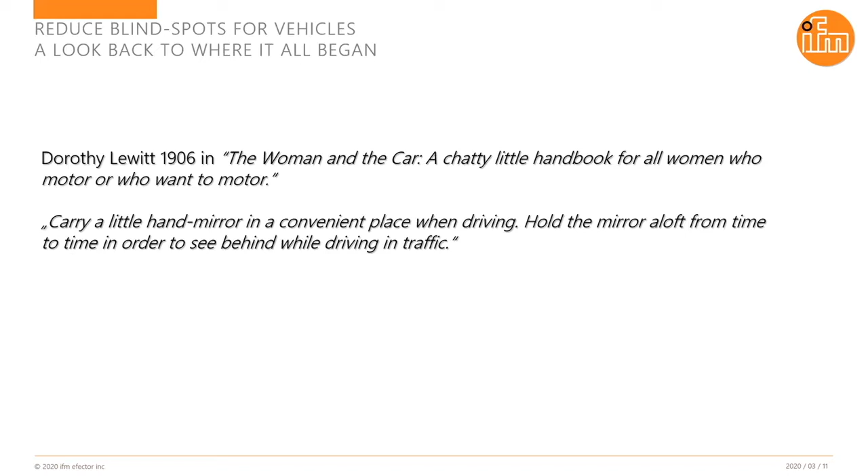And here's a good example. The first ever Indianapolis 500 winner, you can see they have a rear view mirror on board.

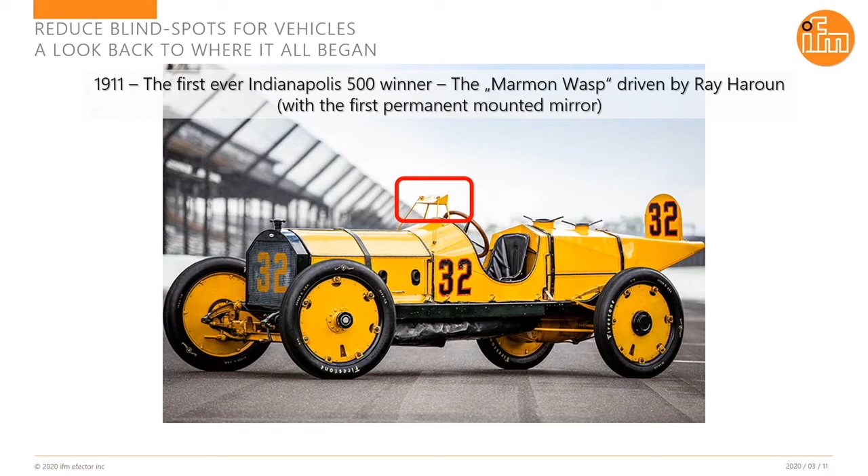I have a little video. You see that everyone is driving with two in the vehicle, and it's quite interesting. Even while going in circles, they had a mechanic on board, and the mechanic's second job was just to check where all the other participants were. And just one guy, you see him here in the middle, was driving alone, sparing some weight. He installed a mirror for himself so he could observe what's behind him. Quite interesting. He did pretty well, it turns out.

So he actually did win this. And in the next year, no one was driving with two persons anymore, but everyone had a mirror on his vehicle. So he had kind of an unfair weight advantage, but it's a small technological advantage that gave him the win.

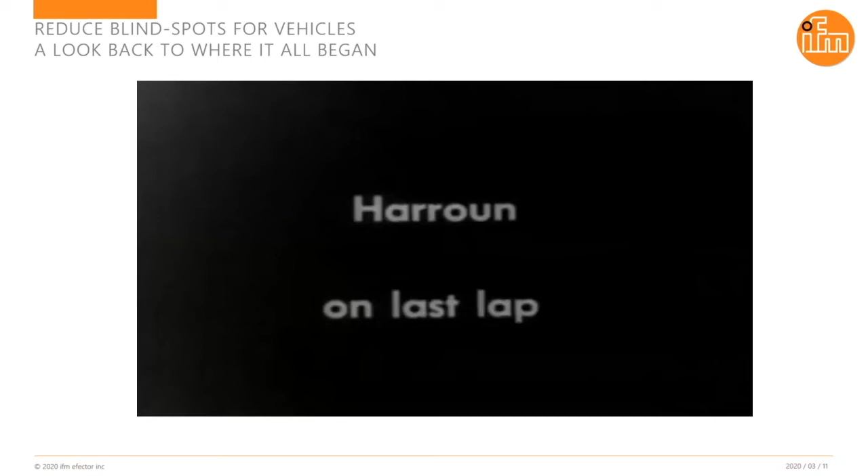Okay, so maybe coming more to our today's world. I mentioned our development and production is mostly in Germany. So in Germany for businesses, we have what we call Employer Insurance Association. For example, if you're a garbage truck operator or in construction business, your employees are insured over this federal insurance company.

That means they make rules on operation safety, for example, to prevent accidents. And they said on construction sites, drive-off, reversing, and for example for excavators, start of turning, are one of the main reasons for serious accidents involving workers on construction sites. So for them, one of the main critical areas in the working process is working with heavy machines and then the visibility for the operator.

So they identified that, and one of their demands is that in order to prevent such accidents, the contractor needs to make sure that the machines are equipped with appropriate technical systems to allow the driver to operate the machine safely. Meaning, if you're the responsible person on the contractor side and it's your machine, you're responsible that the machine is equipped in a way that the actual technology allows the operator to operate it safely and see, for example, that there are no blind spots. And there are some recommendations on that.

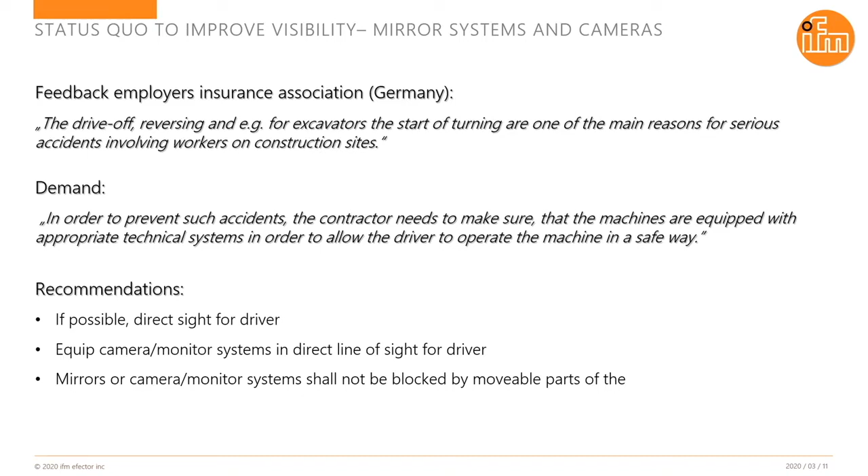If possible, direct line of sight for the operator is preferable. If not, then you can equip, for example, camera monitor systems, but the monitor should be in direct line of sight for the operator, placed somewhere he can see it easily. And the position of the cameras or mirrors should be such that it can't be blocked—on a wheel loader, for example, that you can't block it with the bucket in front. So those are some recommendations and demands.

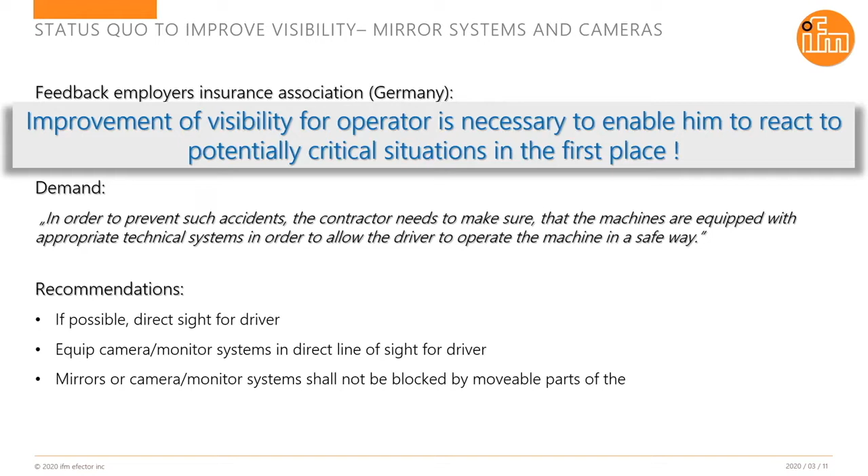So these are some requirements. They say I want to improve the visibility for the operator of the machine, but if you think about it, that's necessary so he can react to situations in the first place. If he's not able to see if there's a person or worker in the way, he can't react. But the point is that the risk of accident in this case is still dependent on the skills, concentration, and physical state of the operator.

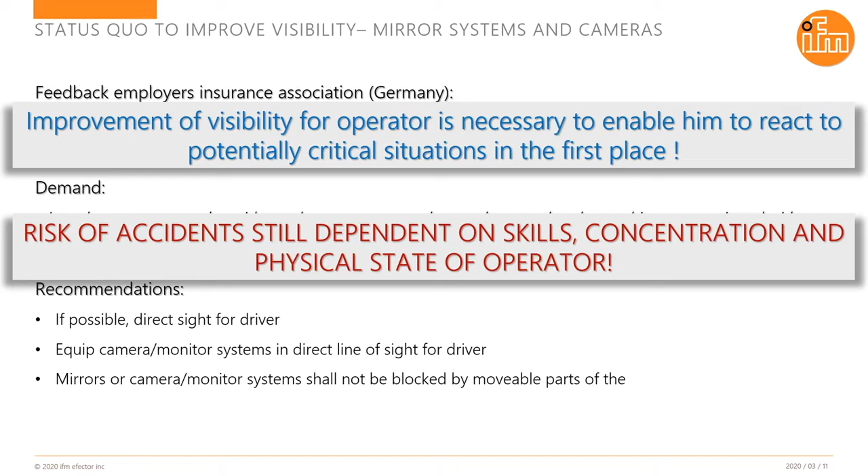So if you have an experienced operator, he will be fine. But maybe if someone is new to the job, or today maybe working on a smartphone in parallel, the safety is still dependent on the operator itself if you just have a vision system.

So that means the trend is clearly toward active assistance systems. In this case, active means I have some kind of sensors that can detect persons or obstacles by themselves and can actively warn the operator visually or acoustically, and even block or stop the machine. This is a big step into more safety, because even if the operator somehow is not up to the task in that second, the machine will stop by itself.

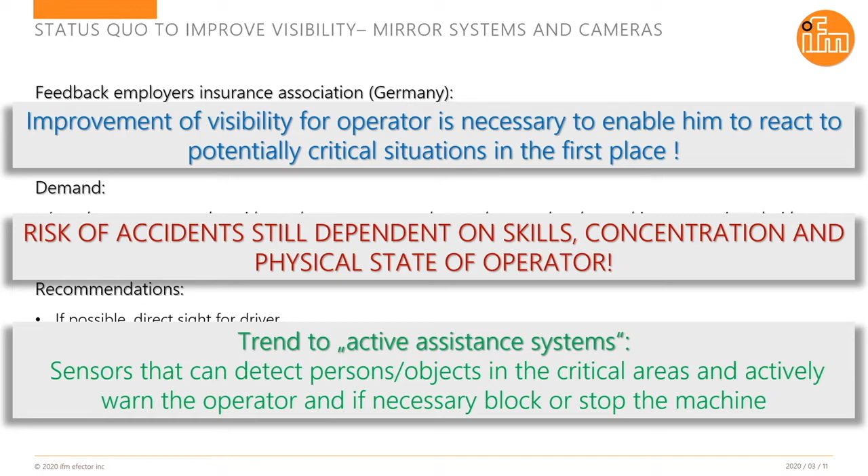So here we'll talk through the different levels of autonomy you're probably aware of, level 0 through level 5. The idea is level 0 means you don't have any assistance, all the way up through the machine can drive itself at the push of a button. So we have a couple examples to show you some of our real customer applications and where they fall into these different levels.

On level 0, there are assistance systems because as long as there is no intervention into the vehicle itself - meaning you have a system in a car, for example an ultrasonic sensor for reversing, but it's not braking the car, it's just showing something or beeping - then it's level 0 assistance.

One example for that: it's a wheel loader in a mine. In this case, it could be a system with a 3D sensor and a 2D sensor, and it works for the operator in a way we'll see later - he's acoustically warned, and you see that he has a monitor with a live feed from behind the vehicle, plus it's actively measuring with a 3D sensor for objects.

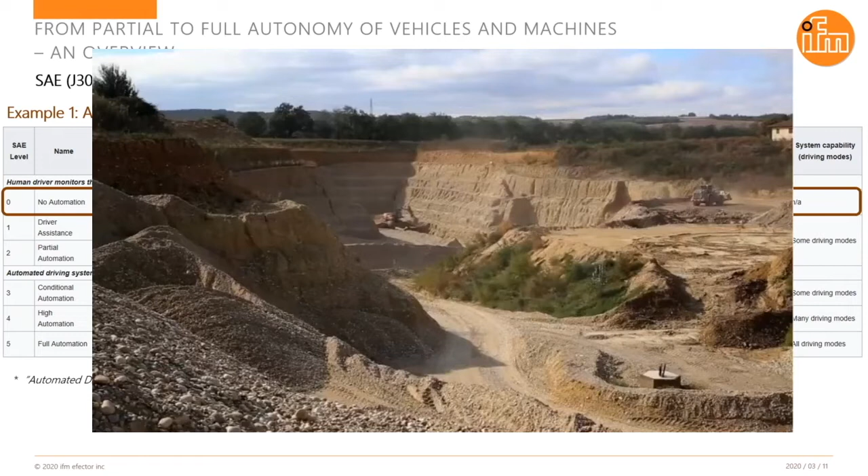So the next step would be level 1, which per the SAE definition - which comes from the automotive business - says that the driver assistance now interacts with the machine, for example by braking, but the responsibility is still with the human driver. So maybe we can see the next example.

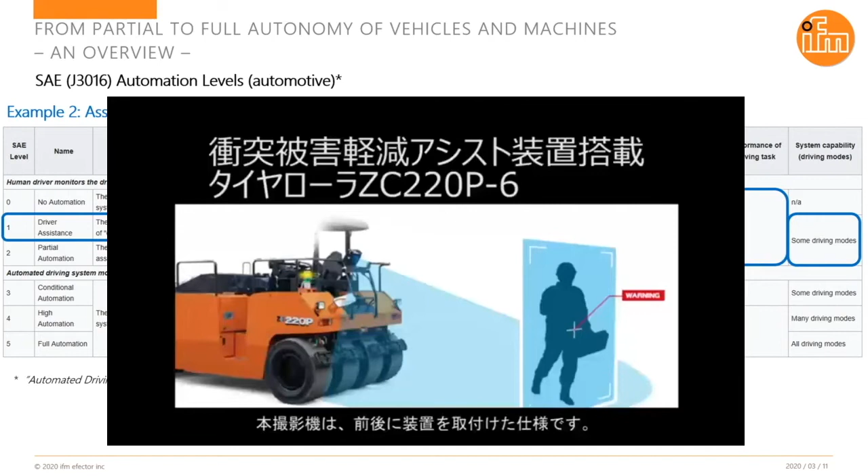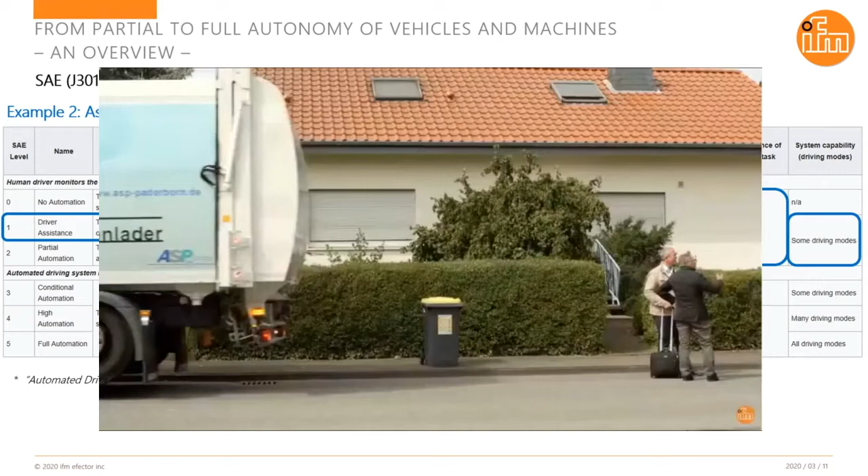That's one from a customer of ours in Japan who makes compaction rollers, very similar to what we saw before. But in this case he connected it also to the brake. So basically it has 3 levels of reaction: one is, like before, a warning, acoustic and visual - we'll see an example. Level 2 means the machine goes slower, and level 3 means it stops if no reaction happens.

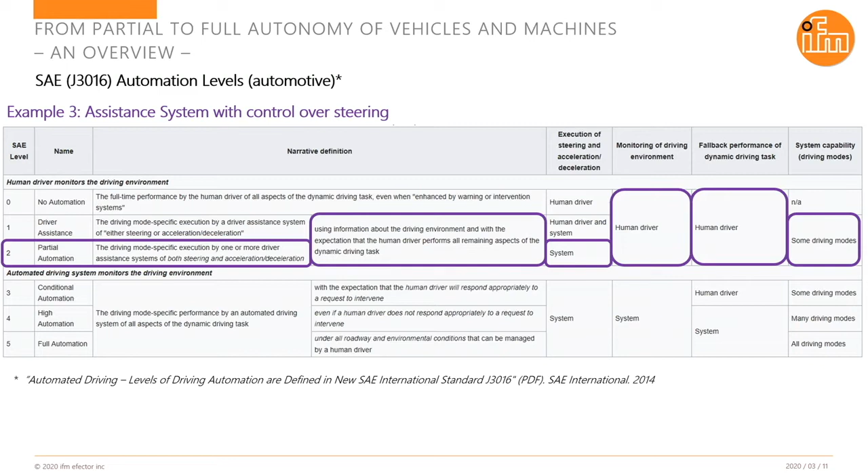So you see here, level 2 now it's getting slower, and level 3 it stopped before it crashes into the person. And we see now some example.

What's important is that it's always a bit tricky with an assistance system that interacts with the machine - it must be reliable. So the operator, if there are too many detections without cause, it won't be accepted by anyone. It will hinder your efficiency.

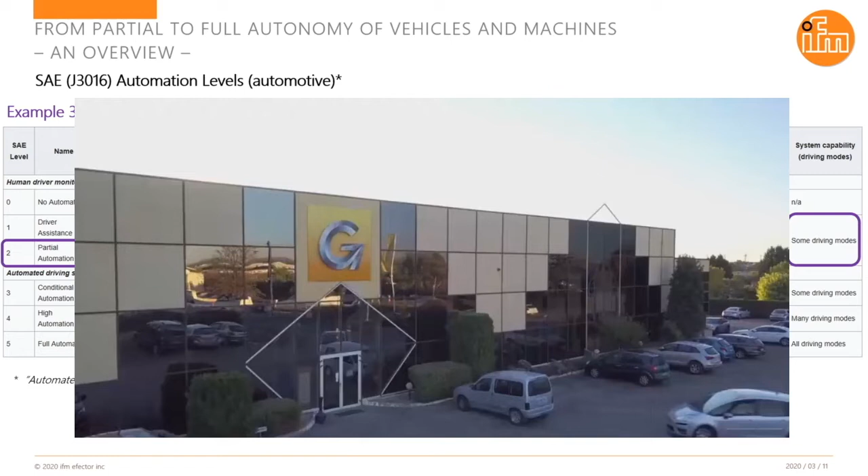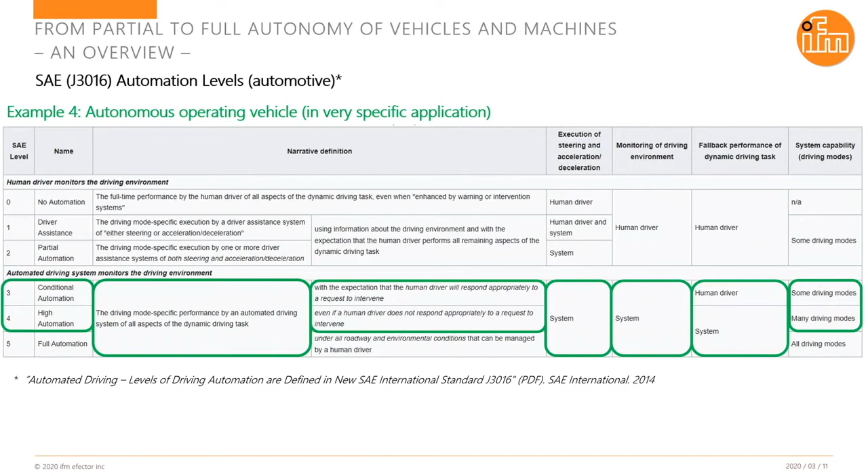But you have some critical cases, for example something coming in from the side, maybe small, it must react. But in other cases, like with a compaction roller, you sometimes need to go very close by a wall, so the system must be very precise - you're allowed to drive by, but still need to react to a person. And lastly, you see he's trying to accelerate - it's also blocking the machine from starting if there's something in the way.

So that's one example; we have another example - a garbage truck company in Germany. They also actively engage the brakes in case there's something in the way. It's also critical because the machine is big and there have been accidents, because they may approach not only trained personnel or workers, but also be on normal streets.

So in this case, it's similar - first a warning, then the brake is applied. So again here, if the driver operator is not reacting, we can have a stop of the machine in order to prevent accidents.

Okay, so the next point here would be that we do not only brake, but have some influence, for example, on the steering.

So that is an example of a customer also in France, where he has some specific vehicles for grape harvesting. And the operator in this case has multiple tasks to do. First he has to drive the vehicle along the grape lines. But secondly, he has to control the machine, for example, they are shaked for getting the grapes out, but he has to control how much is shaked and so on. So the advantage we have here is that the steering is taken over by the machine based on the 3D output. So it's an assistance system which allows him to concentrate on the control of the machine, so that he can be more efficient in the way he harvests the grapes in this case.

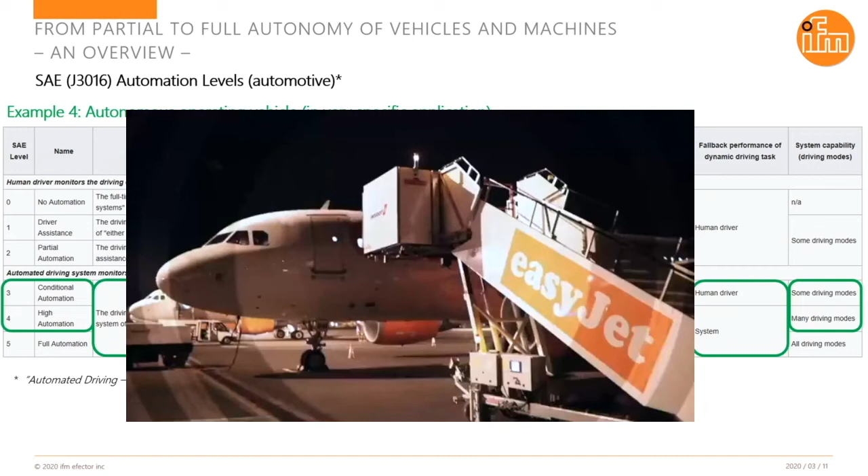So we've shown you guys a few videos of our technology in action on customer vehicles, but we haven't really talked at all about how it works. So a little bit of the science behind it.

Essentially, our key technology is a 3D camera sensor where we measure time of flight based on infrared light bouncing off the object and back. We do that calculation internally, and then the sensor does some post-processing on board and sends obstacle data or other data, for instance with the steering, into the control system. So there's limited downstream processing - it more so happens internal to the sensor.

And Dr. Kever can talk a little bit more about the specifics of the chip and what's going on under the hood. Yeah, so this technology is basically, you could also call it LiDAR because it's often used in recent years, but basically it's the same principle. So we are actively sending out a signal, in this case infrared light, and what happens is if it hits some object or something in the way, it's back reflected, similar to a radar. And what happens is that you can measure the time the light needs for going to the object and coming back, and out of this you get the distance. So you get an image of your surrounding in 3D, measuring the distance.

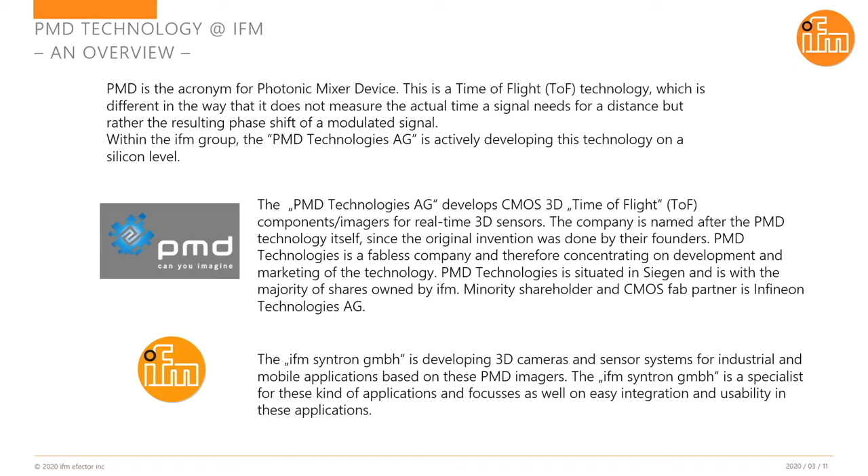And for this technology, there's a daughter company of IFM called PMD Technologies, which does all the CMOS work for us and makes the actual imagers for this technology. We are a majority shareholder, and we have a minority shareholder who is also our partner with a fab for CMOS - Infineon Technologies. So we are working together with them on this technology. And we as IFM take these imagers and put them into sensors and cameras and do all the software around it, and try to solve applications in different markets.

And as I mentioned, the basic principle of time of flight, like used in radar for example, is that you send out a short pulse and you get some reflection back. The distance can then be calculated out of the time the signal needs to come back, and in our case this is over the speed of light - you can calculate the distance. Light is quite fast, right? So 1 centimeter is roughly 67 picoseconds of time in this domain.

This is, for example, also used in every laser scanner. This measuring principle, PMD, is a bit different in that we are not sending out a single pulse signal, but rather a long signal which has a kind of modulation, repeating at some specific frequency, in this case mostly between 5 and 100 megahertz.

Our light signal, we are not looking at one time delay, but rather at the phase shift. So what we get is a periodic signal sent out, and we get a periodic signal back, and there's a shift in the phase between them.

It works quite nice because it's much easier on the electronics to evaluate that instead of these very short times. So we need much less bandwidth, which allows us to build images like 2D images which capture 3D, and we have a lot of resolution in that.

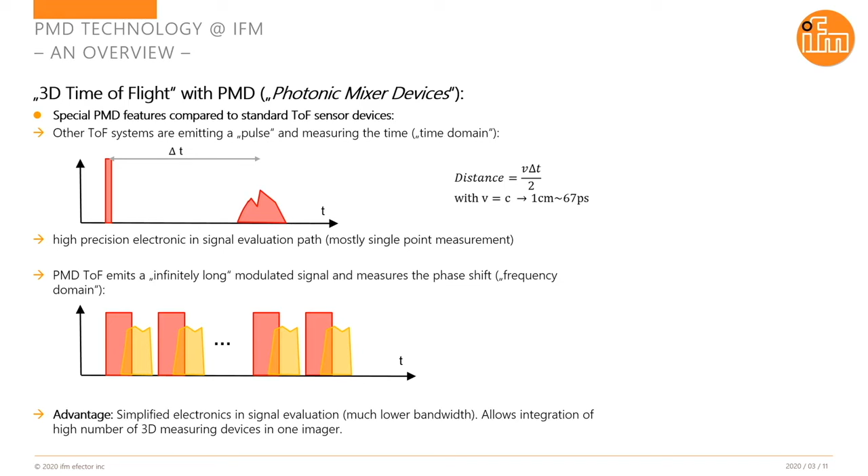Maybe that's a bit of detail, but the pixel itself is like a normal photodiode, but a bit special. We have not one capacity which we are loading with the information, but two.

We are modulating with the frequency I showed you before, also the receive unit here, meaning that depending on the frequency, it's put into the two different capacities.

The difference in the capacity, so a difference in voltage, is directly proportional to the distance, and that is what we evaluate. You see the advantage here: we don't need to try to measure very precisely a short time, but rather we get some voltage signal which is easily evaluated. So this is a single pixel, and we build up a patch, an imager with a lot of pixels, and get all the information at the same time.

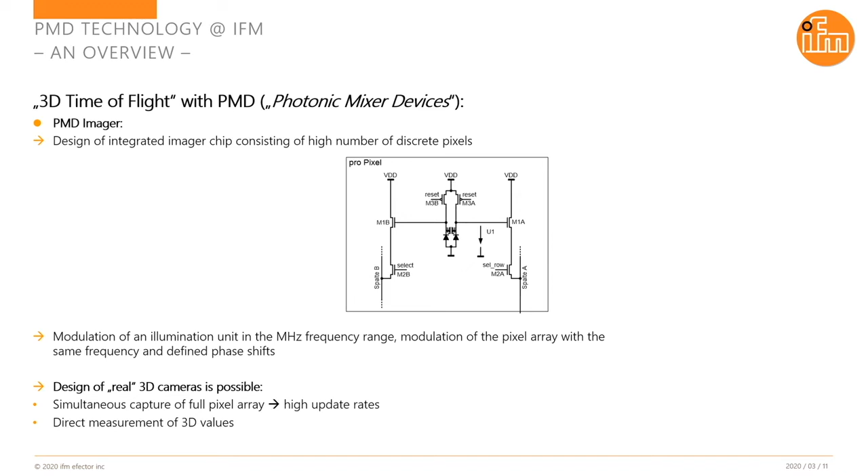We are trying to do this for many applications and markets. With our daughter company, PMD Technologies, we try to address the consumer market. Typical applications here are gesture recognition, face unlock on the smartphone, some games, virtual reality stuff, and also automotive applications, mainly gesture control of the radio or something, and important driver awareness, checking if the driver is awake and looking at the street.

Then we have the industrial business. We are here in the mobile market, mainly collision avoidance, distance control, and other applications like line guidance we saw. But we are also addressing industrial automation and robotics as markets.

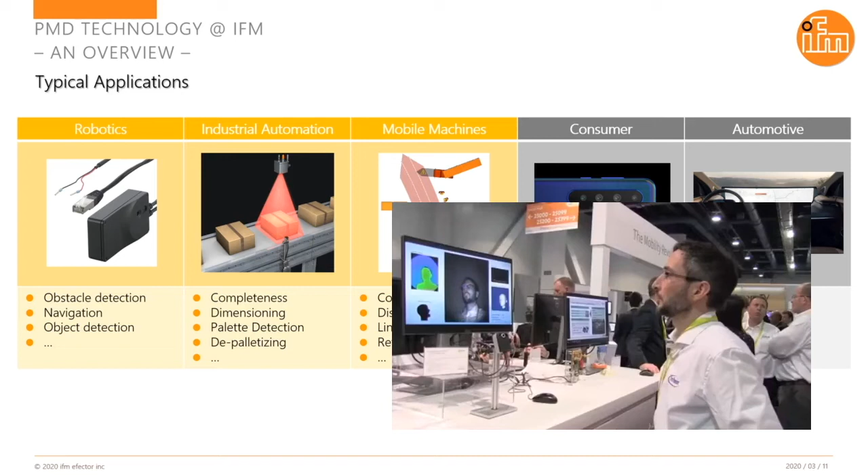This is an example out of industrial automation where, for example, dimensioning is a point that's classically scanned for the size of packages, and this has some negatives here because it's rather slow. You have to stop the parcels and wait until it's measured, but when we do it with 3D imaging, it's much faster.

You can do a single shot image and get all the information. If the band is not too fast, you can even do it without stopping at all. Since you just need one sensor and it's all processed in the sensor itself, you can even have multiple positions where you check, so it's more dynamically usable.

A last application out of robotics: we have a company here as a customer called Bossa Nova, and they make this kind of robot for Walmart. They drive through the Walmart and check the status of the shelves, how many parcels are left.

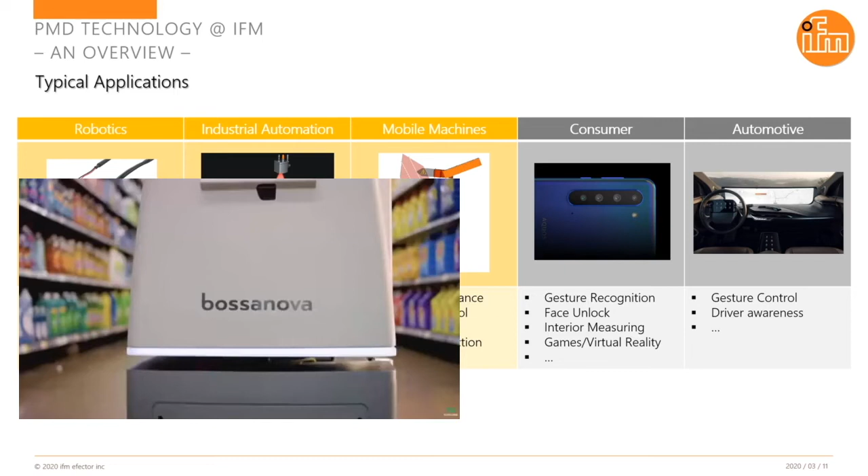This is also present in every robot; there's a lot of 3D technology and 2D. The 3D shows you where the parcels are, and the 2D can read the barcodes. This is fully autonomous, going very slowly through the supermarket all day, scanning the shelves all the time. But today we want to focus on the mobile applications, so this is for construction sites, for example.

And there's maybe one point which is quite important. If you want to have it useful in construction equipment, you need to be very robust. So it's a very harsh environment. You have a lot of dirt, vibrations, shock, temperatures.

That's why we specifically designed for this market, meaning temperature range -20 to +85. Protection rating: machines are typically cleaned with high pressure cleaners, so you need to withstand that. Then there's a typical operating voltage, so 12 or 24 volt battery, and shock vibration resistance. There are no moving parts, so we are quite robust against shock and vibration.

The other point is that the preferred interface is a CAN network. We try to solve the applications based on CAN networks, so it's not necessary to have Ethernet cabling, because depending on the machine, if you have different parts that have to be put together later, Ethernet is a bit difficult to cable.

That's also the reason why we try to put the full software and functionality within the sensor, meaning we don't need to transfer all the 3D and image data to some other place, but rather do the evaluation on board. So we can just transmit results via CAN.

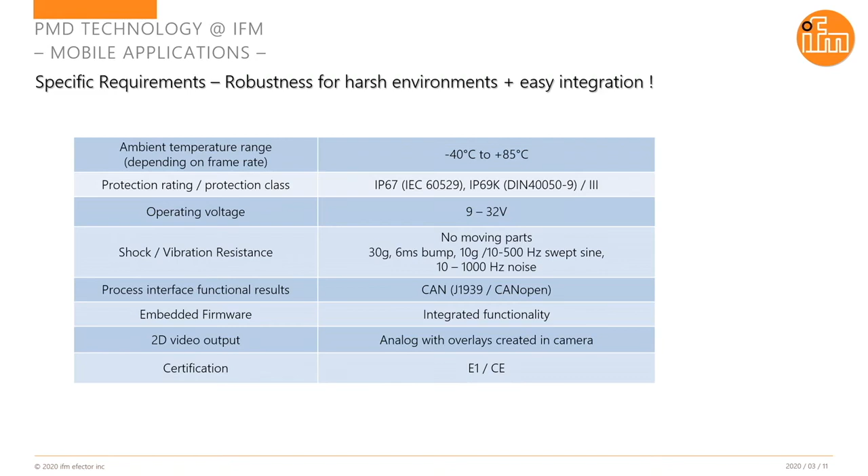And we also have the E1 certification, meaning if you have a vehicle which is also driving to the construction site, for example on a normal street, you need this to be allowed to use it there.

Okay, here we're going to have a little bit more fun with our scary garbage truck videos. We talk through a few different use cases where these vehicles might, one, be approached by a person, or on the other side you might have some part of your road that you need to interact with, or a very small object, maybe a child running out into the street in an unpredictable fashion.

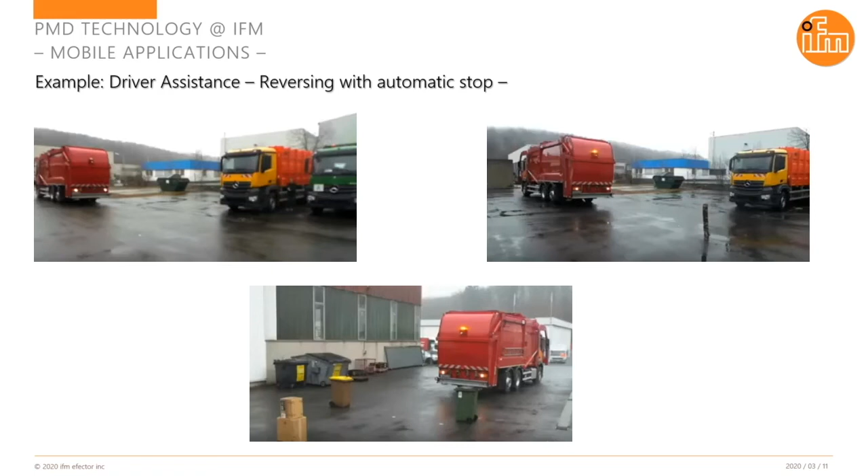This is then filtered and clustered. So what we do is look at the pixels and, in the software, segment them and put them together. We are not interested in single pixels, but rather in objects. So we cluster them into objects and track the objects.

Object tracking means we get for every object information like where is the object, at which distance, at which position, which height, but also what size the object has, and also its movement, which is quite important. Is this object stationary or is it moving, and is it moving in my way or out of my way. All this information is derived here.

Then we have a path where, if we have information on the vehicle, the velocity and the turning of the vehicle, we can put these two pieces of information together and see where the vehicle is moving and where the objects are moving. By this we can be more intelligent by predicting if there's a critical crash coming up or not.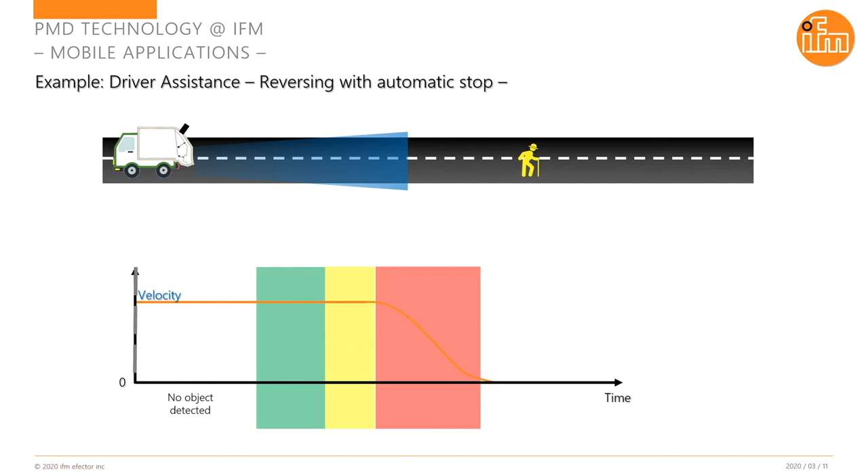So maybe we trigger an acoustical and optical signal, and then wait to see if the operator does something. There's some point of no return where we say, if you don't react here, you will crash into the object. At this point there's a second signal sent directly to the brake, and you see then the vehicle will start braking and stop.

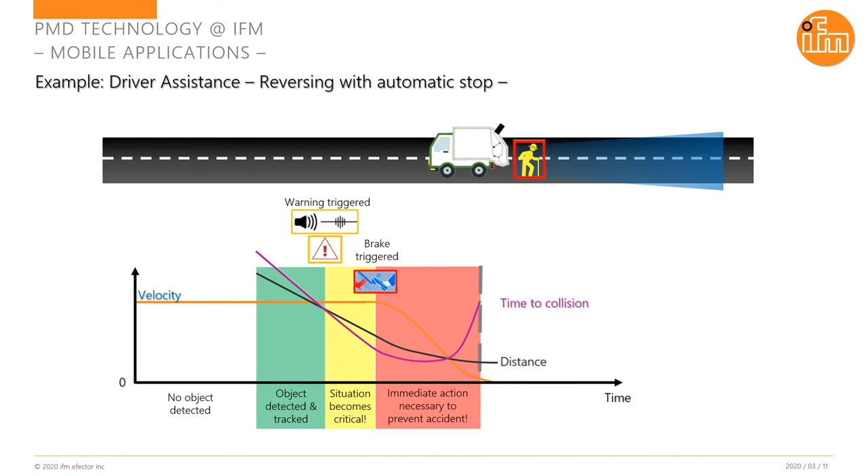So we reduce the velocity, meaning that the distance is getting closer, but at a slower speed. The time to collision at some point starts to grow because I'm braking, and in the end I will stop, hopefully just in front of the object or person.

Just an example how this may look like. If you know the velocity of the vehicle and the direction, you can predict where the vehicle is, for example, in 1.5 seconds, and see where the objects are. There are critical cases where you're on a collision course with an object, but other cases, if you're turning in a curve, it's not critical even if there's an object. So I can react appropriately.

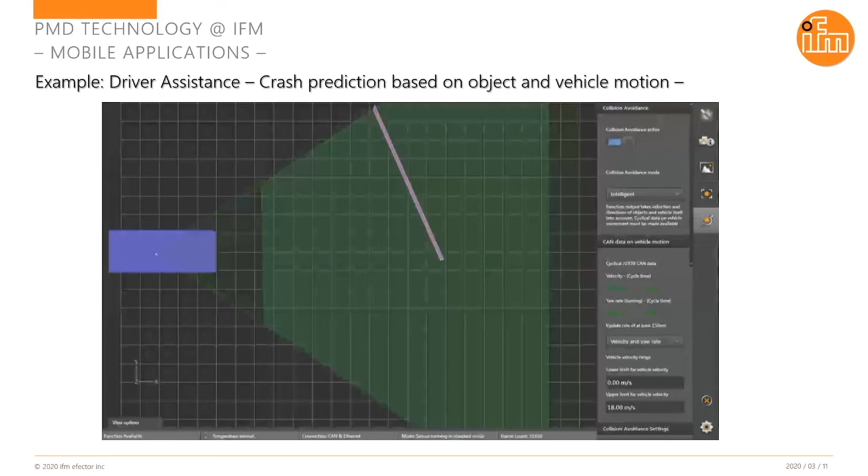Okay, so maybe also some examples. Sorry. Yeah, no problem, it's good. Just carry on, so I'm just going on.

This is very similar, predicting where the vehicle is. You see this bit where it shows it's critical, and this is the object. When the predicted position of my vehicle is crossing the predicted position of an object in the same time frame, then it's critical.

We see another example now. Here, it's basically not a vehicle I'm driving, but in this case a person, and it's the same in both cases with a static object.

Now another case: when I drive behind another vehicle but we're going at the same speed, it's not critical. We are here and not reacting because this vehicle is predicted to be here, so we're at the same speed. You see velocity in x, the relative velocity between us and the object, is nearly zero. So it's not critical.

So this is an example: if this car starts to brake, you see the relative velocity between our vehicle and the vehicle in front will increase, so it becomes more critical, and then the sensor starts to react. Just one last example.

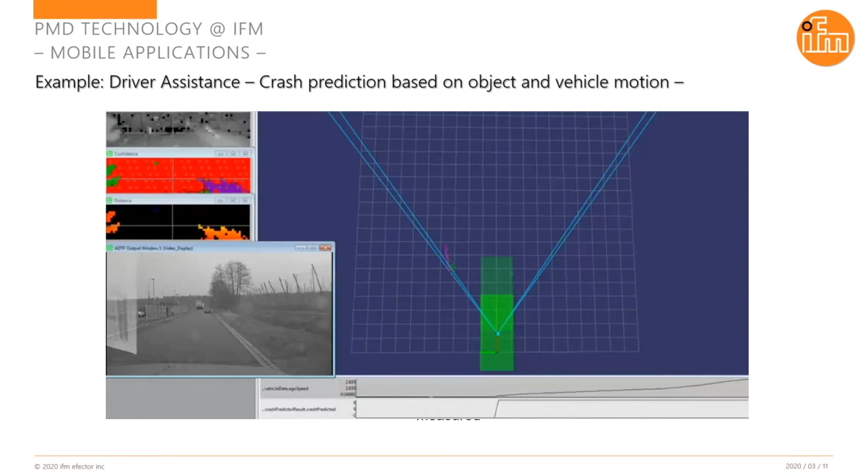So those are some examples, and we try to visualize a bit more. For reversing cases, we played a bit with a drone so you can see what happens and what the system makes out of it. If you drive backward, you get the distance and the warning here.

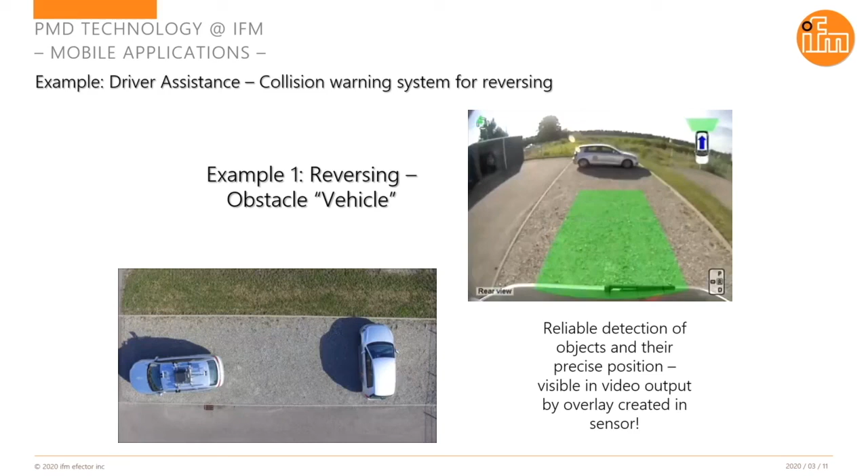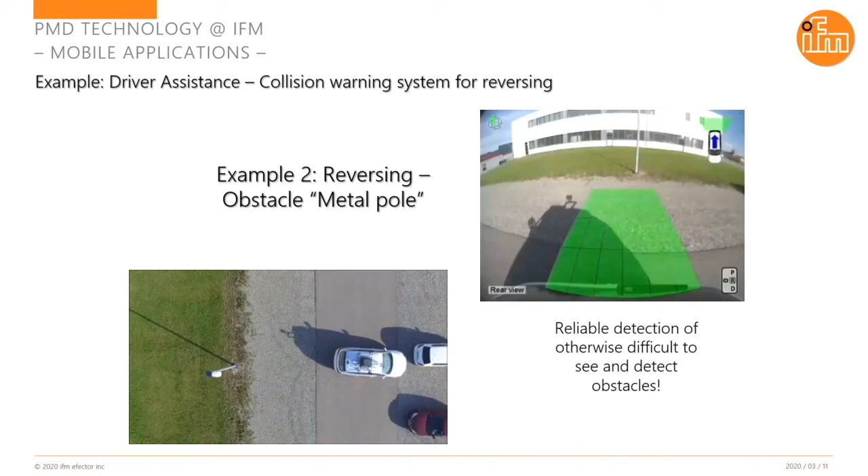Next, you see that even a metal pole, which is a quite hard to see obstacle, works fine. It's detected here, and you get the distance. So even in this case, it's working reliably.

Okay, that is an example. Like I said before, it's critical that it's very accurate. You see the driving path is free, and it's only on the sides here that there are objects.

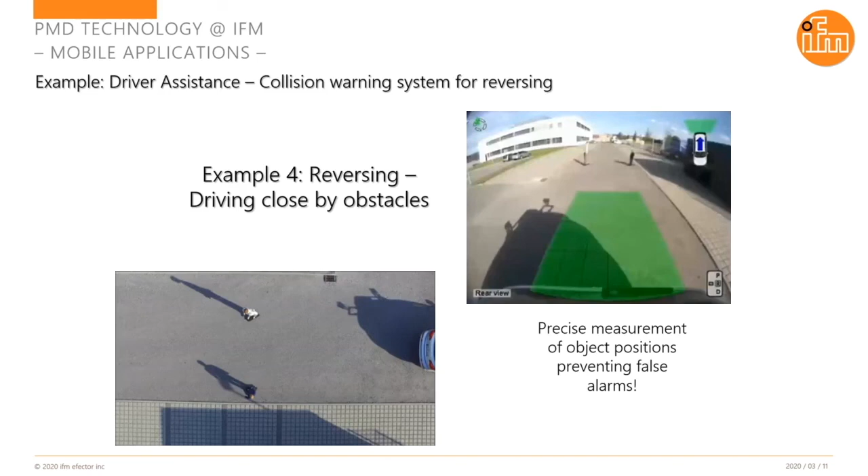So in this case, our point was how can we make this rather easy, so that it's useful, because it should be that you don't need to be a vision expert to use such a system. The idea is to make a set out of it where you don't need to be experienced in vision. All hardware we use for that set is specifically developed for harsh environments, so it can be used on construction equipment.

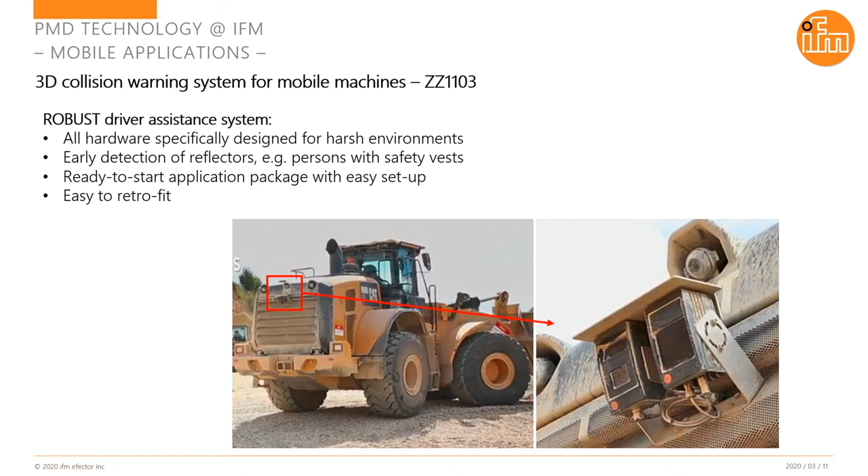We have a package which is easy to set up and easy to retrofit on machines. This is an example where we put it on a wheel loader, and you see how the visualization may look like: the object is highlighted, you get the distance information, and the color of the frame indicates if it's zone 1, 2, or 3. So that's the implementation we've done, and it should be easy to use.